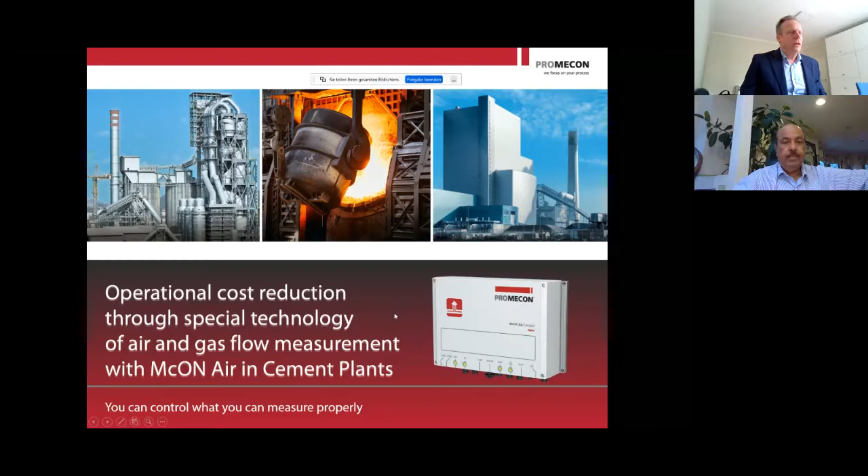Actually, what I would like to focus on today is process gas flow measurement. We also call this airflow measurement because very often process gas is air, but very often it's also combustion gas that we have to measure at various temperatures and also with different dust and dirt content. And that's a very difficult task, but it's very important and crucial, especially in the cement industry.

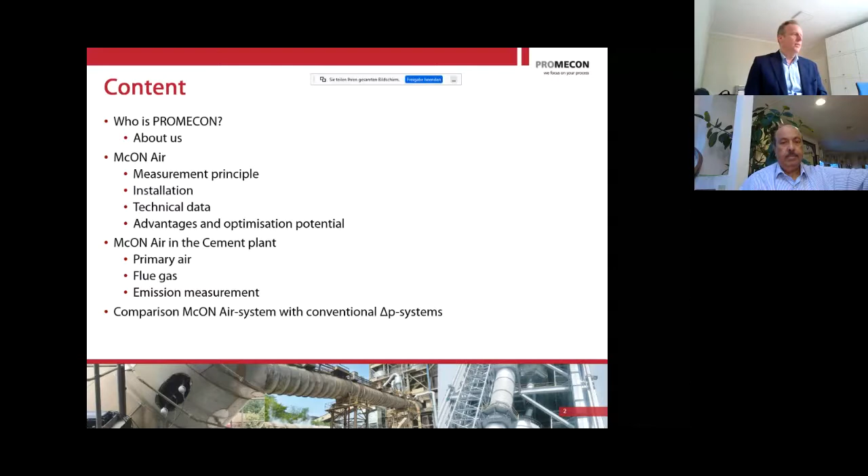I'm going to talk about our measurement principle, which is quite unique. There's nothing else on the market really similar. On the installation and the technical data. And of course, I'm going to talk about the advantages and the optimization potential in your cement plant. Cement plants are consuming huge amounts of energy, not only for the pyro process, but especially for moving process gas around the plant. So I'm going to talk about various options here.

As I mentioned, we were founded in 1995. We're located close to the city of Magdeburg in Germany, and we are selling our systems into the market of power, coal-fired power stations, biomass-fired power stations, into the market of cement, waste to energy, as well as all the smelter industries with a big focus on steel making.

Our measurement systems are used for optimizing the thermal process. And if you had read our logo, PROMECON, it says we focus on your process. We really mean that. Our company has been devoted to the fact that we not only sell measurement systems to the client, but we look into the installation. We even do CFD analysis of the big ducts to see where the measurement has to be located, ideally.

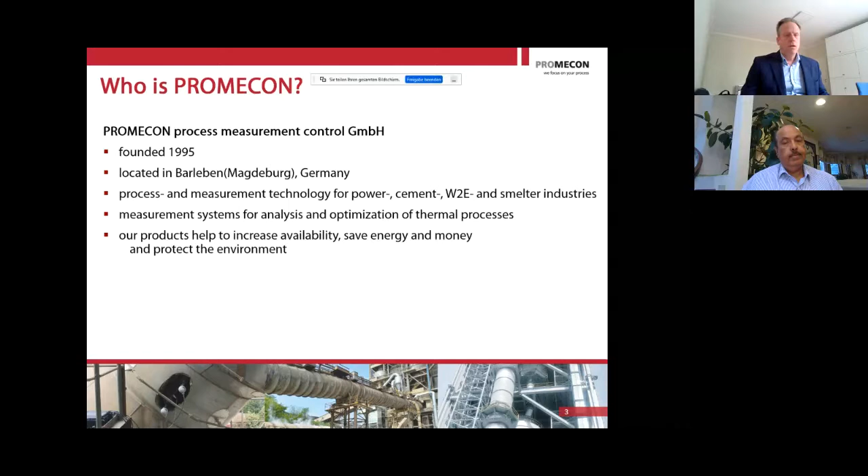We also understand a lot of process parts, so we can also give you the advantage or calculate the benefits and savings. So we are really a partner in your process optimization. And what we're talking about, of course, is energy conservation, ecological compliance, and at the end of the day, saving money, saving fuel, and saving electricity. So I'll just move on.

Here you can see basically our system. Our measurement system is different from the traditional way of measurement. The traditional way of measurement is usually measuring the delta pressure over a certain flow resistance. So you have a venturi or you have an airfoil and you measure the delta pressure. When you have a lot of dust, this is very, very difficult because your pressure taps keep on clogging.

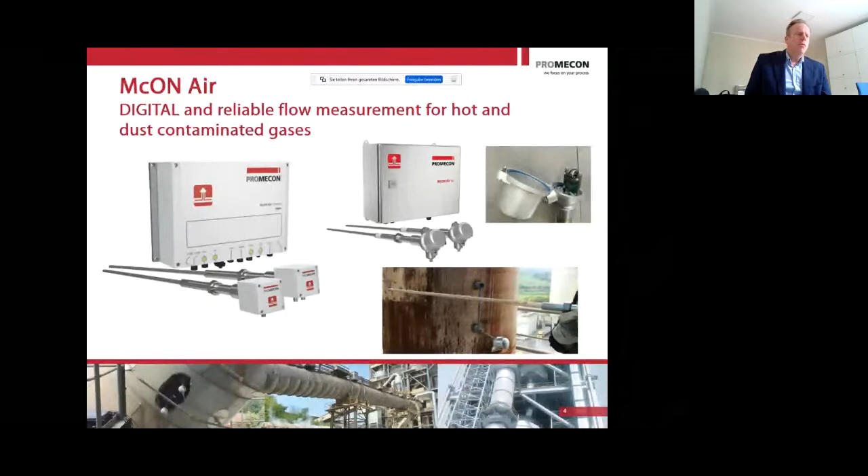Our measurement technology is unique. We use two sensors and we use a cross-correlation technique to measure the flow velocity in your duct. And here is how we do it. We have two sensors which are mounted along the duct. So basically, we're having one measurement upstream and one slightly downstream.

And when I say slightly downstream, I mean about 300 to 400 millimeters of straight run. So very close together, you have these two sensors. And what these two sensors are sensing is basically electrostatic charge.

All the particles going through the duct are electrostatically charged, so they will carry a positive or a negative charge with them. So as these clouds of particles move through the duct, they will leave an opposite charge on the sensor. And that means as the clouds come and go, we will see a current. We will see an electrical current on the sensor. How does that look like?

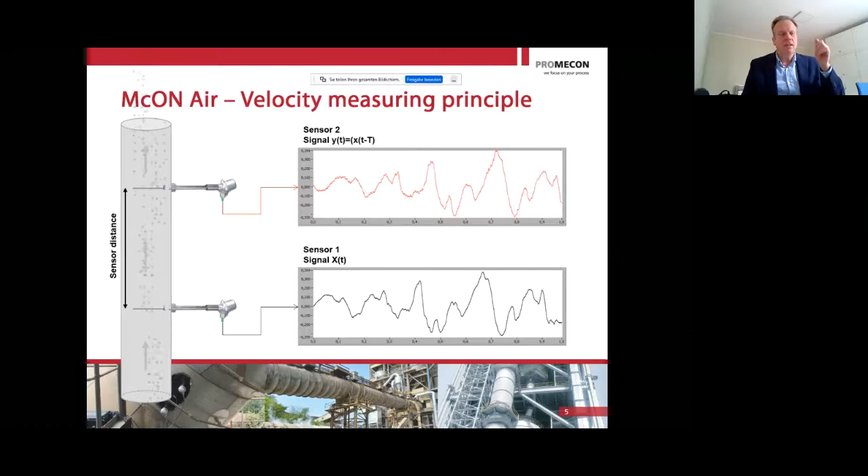Take a look. These are the particles going through the duct in your cement plant. Raw meal, cement meal, clinker dust. And this is what we measure. Our system measures these raw signals. And these are basically a time signature or a fingerprint of the clouds passing by the sensor, right?

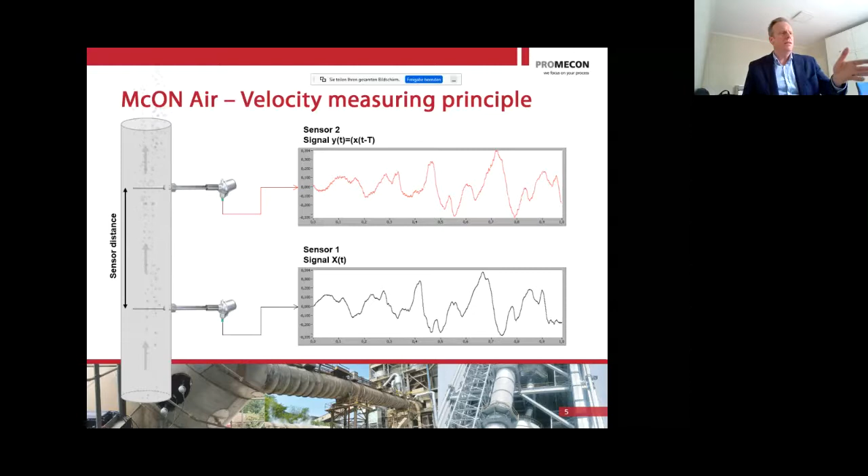Now, as you can see with your bare eyes, the time signature on the two sensors is very similar. You can see this. The bottom and the top are very similar. But if you put them on top of each other, you will see they are similar, but they are time shifted, of course, because one sensor is upstream, one is downstream. So the big question is, how big is that time shift?

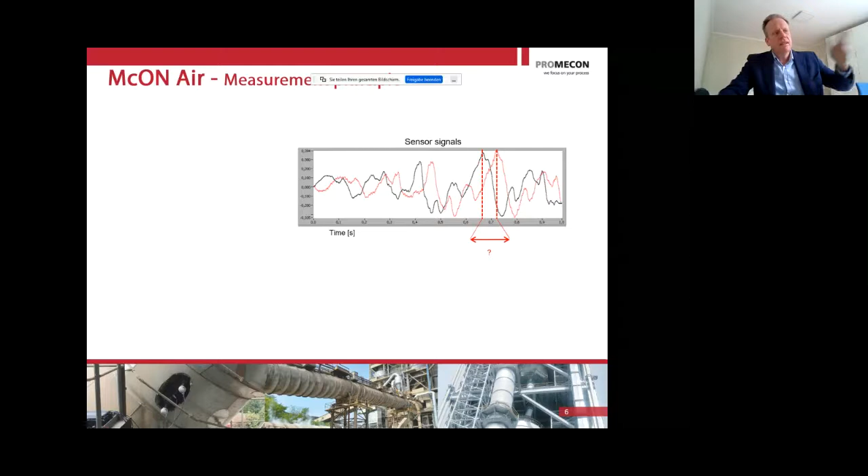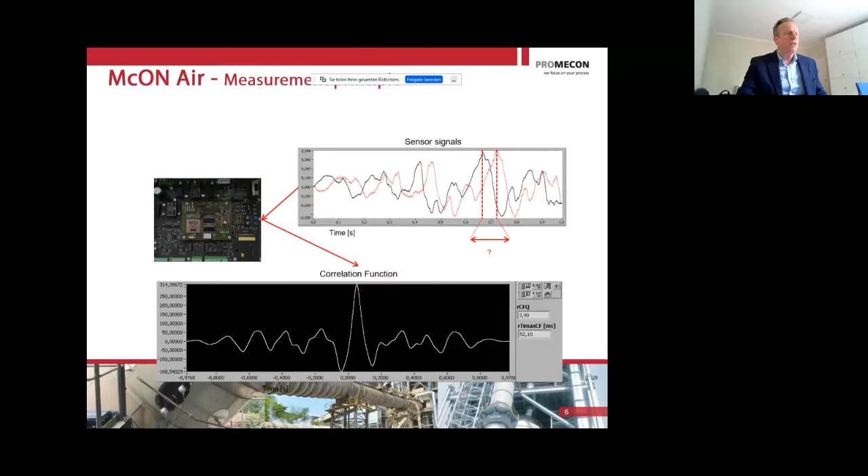And here comes the digital part of our measurement. We have these signals that we record, and then we put them into a digital algorithm, a so-called cross-correlation function. And this cross-correlation function will shift the two signatures until the point that they have the best match, right? So we have a calculation of time shift, and the cross-correlation function will tell us, okay, the maximum of the function is at, in this case, 52.1 milliseconds.

So what our two sensors are doing is they're giving you a time shift. How long does it take the gas to get from one sensor to the other? And now we have the distance of the sensor, for example, 350 millimeters. We divide by the time shift and we get a velocity. So we can measure raw gas, process gas velocity.

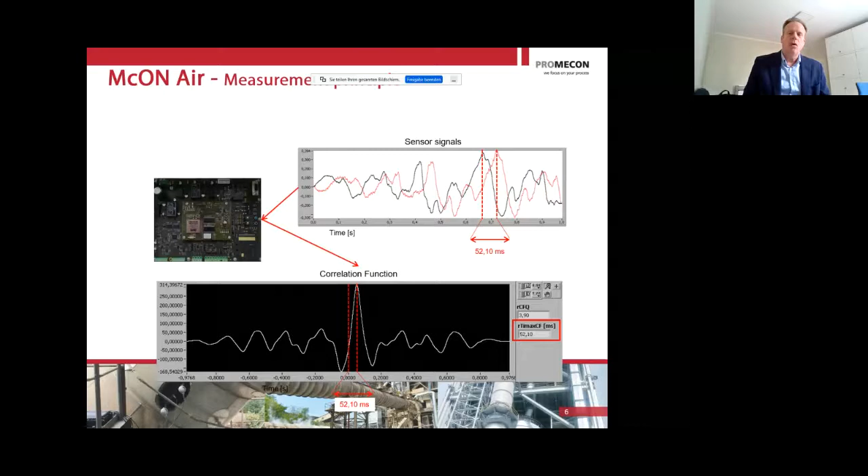Taking the cross-sectional area of the duct, we can then multiply with this area and arrive at volumetric actual flow, right? Now, if you take the gas temperature and the barometric pressure, you can then also calculate the standardized gas flow on that location. That's all. It's a very simple way to measure.

So you can put our sensors into any duct. You should have a certain minimum straight run upstream and a little bit of downstream if you are using one sensor pair. I know that in modern cement plants, some ducts are shorter, are more difficult. In this case, sometimes you have to use multiple pairs of sensors in order to get an accurate flow reading.

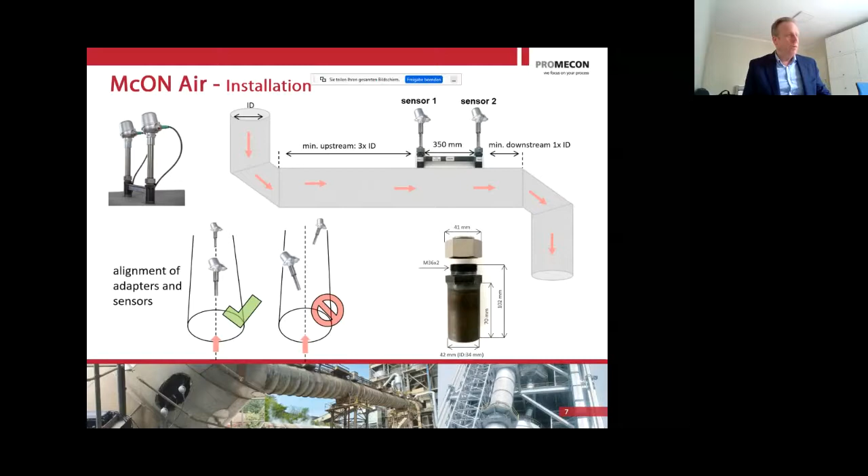Our company will support you with that. We will support you in finding the right location. We can give you some calculations and also experience on where to put our sensors in order to get a valid and accurate reading. Now, I want to let you know a couple of very fundamental advantages of this measurement.

As you can see here, you only have a box and two sensors, and what you get is a 4 to 20 milliamp signal or a system fault signal for our measurement. And since our measurement is purely digital, and since we are only measuring time, time is the only variable that we measure, you will not have to recalibrate any drift or any zero span or anything. Our system is calibration free. It is recalibration free over the life of the box.

And this is why so many cement plants around the world are using our system. We are installing these systems with all the big cement makers: Lafarge Holcim, Cemex, Italcementi, Heidelberg, you name them. Everybody is using these in modern plants, whether they're erected in India or in China or in Africa. A lot of new plants in Africa. Our system is usually specified in many, many plants from the start because it is a drift-free, maintenance-free, calibration-free, recalibration-free system.

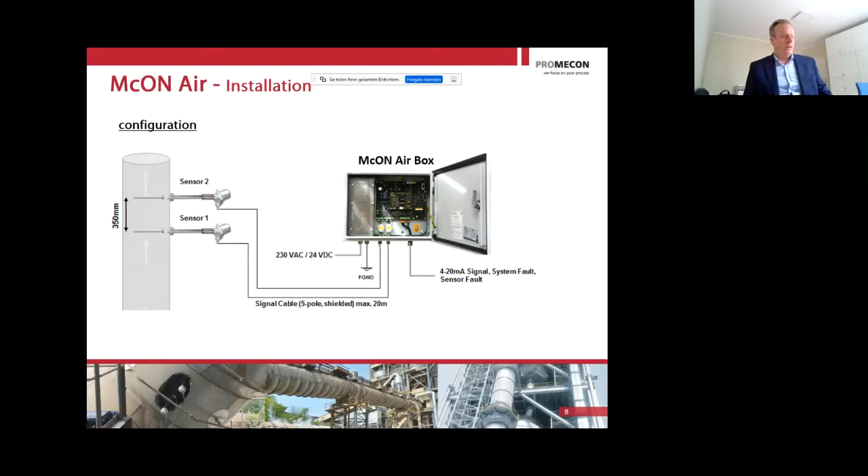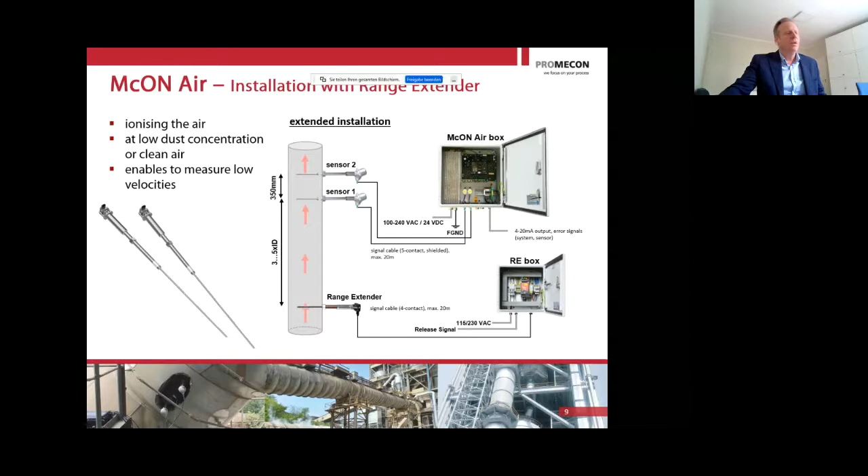We also have a version that uses a so-called range extender if there is no dust available, but I think no dust in the cement plant is not very common. We always have enough dust in the cement plant. So the setup I've shown you before is probably the one that you're going to use.

So what are the characteristics of this system? First of all, we can measure up to 1,000 degrees Celsius of temperature. So you don't have to worry where we measure. We even have some special sensors ranging above 1,000 degrees Celsius. So even tertiary air measurement is not a problem. Measurement in the downcomer, measurement on the bypass, all possible. The velocity range, as you can see, we are measuring delta time.

So we have a linear measurement. And that's a big advantage, again, over the delta pressure, because delta pressure has a square root measurement. So because of the Bernoulli equation, you have a non-linear measurement. The PROMECON measurement is linear, and that shows in a huge turn-down ratio. The normal measurement that we have ranges from a few meters per second up to 100 meters per second. We could even go higher, but that's usually not demanded.

So large velocity range. Dust concentration range. Many people ask me whether this is a typo. It's not a typo. It goes from 0 milligrams, from absolutely zero, to about 3,000 grams per cubic meter. So you can measure actually the raw gas out of the raw mill directly. Huge advantage in controlling the raw mill.

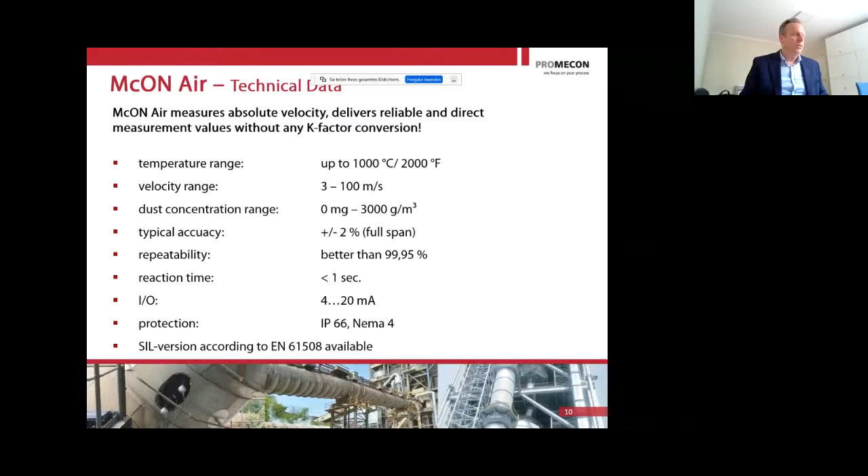Repeatability, it says 99.95%. I think our repeatability is even higher, because the repeatability is only depending on the accuracy of our internal digital clock that samples, right? So our repeatability is the biggest advantage. Reaction time, smaller than 1 second. And again, you get 4-20 milliamps and IP66 NEMA 4 protection.

So what are the main advantages? No K factors for calibration, no drift, no duct modification, no regular cleaning. These are the main advantages. I would like to name another one that has not been on this presentation explicitly, but it's worth mentioning. We have 2 sensors. We are measuring a time shift, and we are calculating the velocity by the distance between the 2 sensors. Why is this important? The distance between the 2 sensors is a vector. It's basically the distance that's orthogonal or perpendicular on the 2 sensors.

Why is this so important? It is very important because we are not measuring any lateral velocities or any swirl component. If you have a swirled flow, our 2 sensors will tell you the velocity vector that is in line with the pipe axis. And swirl is one of the most common factors for mismeasurements on these large plants. If you have an airflow and it goes around 2 corners, up and right and down, then you will automatically have a swirl, right? So swirl will not affect our measurement at all. And therefore, it is very worthwhile mentioning.

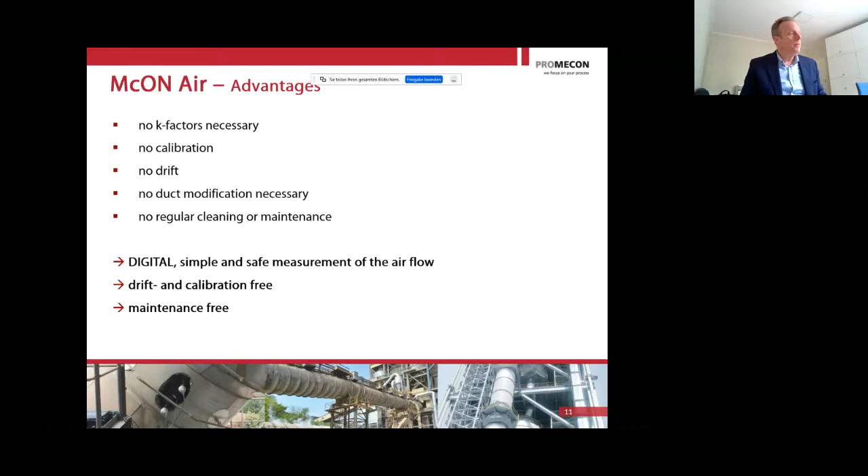So I would like to use the rest of the time that I have to show you some typical examples of where we measure and what we do in a cement plant. You can see a typical cement plant here. You can see a vertical roller mill, raw mill, and the outlet of the raw mill, and also you can see the recirculation duct going back into the raw mill, right? So raw mill is a very big focus of our measurement in a cement plant. Then, of course, further right, you can see the bypass, also a very important measurement. And then on the kiln preheater tower, you can see the downcomer.

The downcomer is basically our most popular measurement. We sell more downcomer measurements than anything else because it tells you something about the main gas flow through the whole pyro string, which is a very essential value, not only for operating the ID fan at the lowest possible energy consumption, but also having the right flow and the lowest possible process noise in your pyro process in the rotary kiln.

Then further to the right, you can see the TA, tertiary air measurement, especially for people in India, I think at these times quite interesting, because the tertiary air is the oxygen input to your pre-calciner. And the pre-calciner is a big source of thermal NOx, and NOx emissions in cement plants are a very big issue in India at this moment. So better control of your tertiary air into your calciner is a big point. Now, you can either create the NOx in your pre-calciner, or you can create the NOx in your main burner on the kiln head. So to mitigate both, you need the correct airflows, and the TA measurement is a keystone for that.

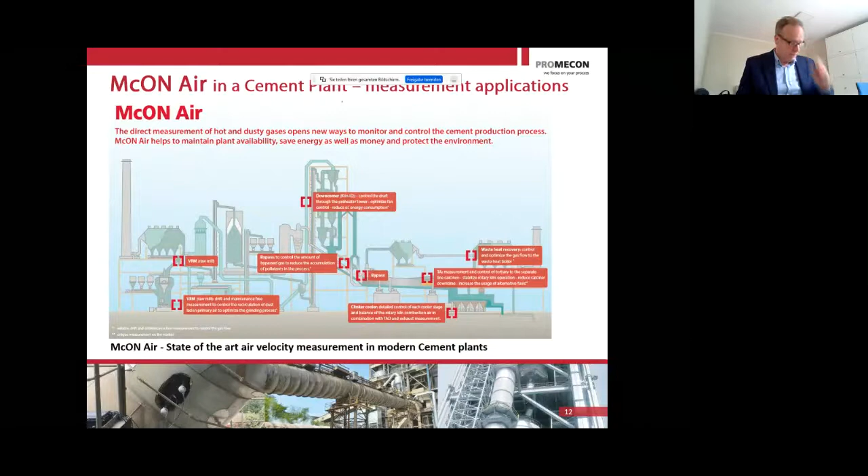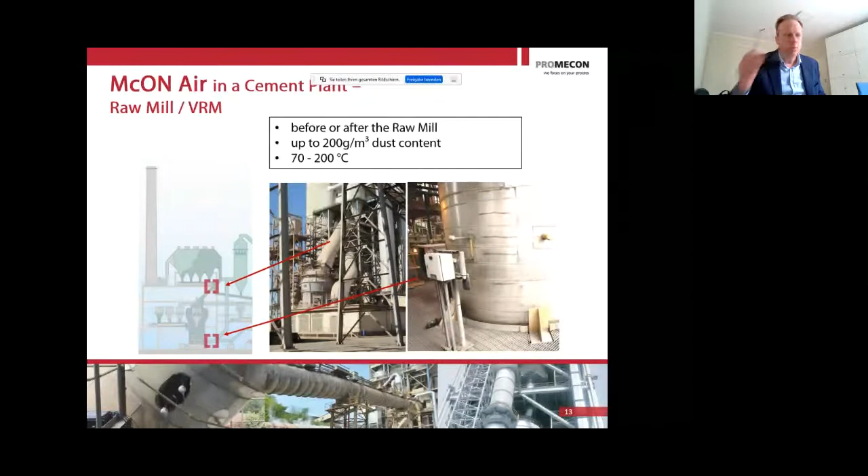Let's start with the raw mill. The raw mill is one of the most important systems in the plant, and it has a huge energy consumption. Again, here, a big part of the energy consumption is really related to ID fan consumption. Now, how is the ID fan operated? You all know how your operators struggle to keep the raw mill operated correctly. So the ID fan has to be operated in a way to achieve a certain minimum flow.

If you underdraft the mill, you will fill up the mill, the mill will drown, and the mill will trip eventually even, which is a major event. Nobody wants that. Raw mills are big monsters. Nobody wants to shovel out a raw mill. Cleaning out a mill is a big thing. And we found that in many places around the world, operators tend to overdraft the mill in order to have a safety margin on the air draft through the mill. So the security factor is there. Usually it's like 15%, sometimes even higher, right?

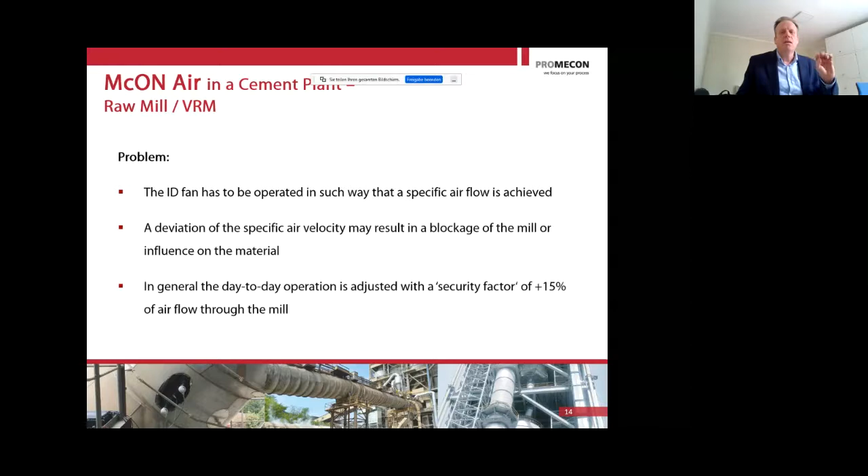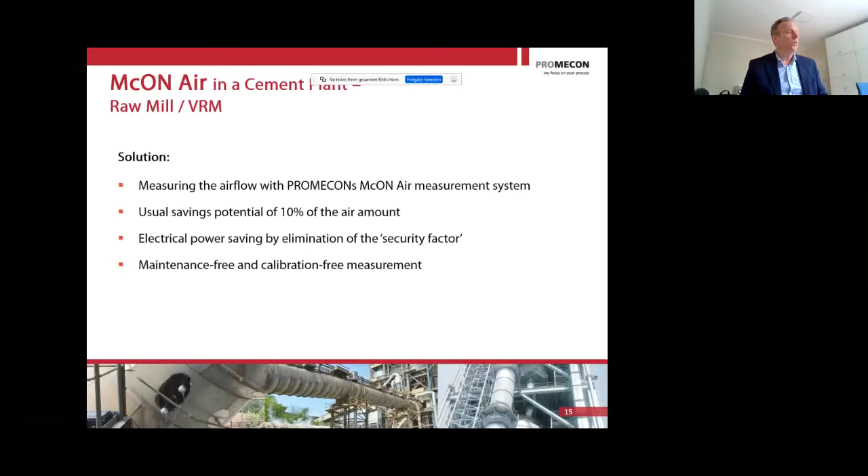Now the big point here is the PROMECON system allows you to have an exact measurement of the raw gas through the mill. And by that, you can reduce the safety margin to a much lower value. And this results directly in a huge saving of electrical energy on the mill fan, because the mill fan is usually a very big fan for these sort of mills.

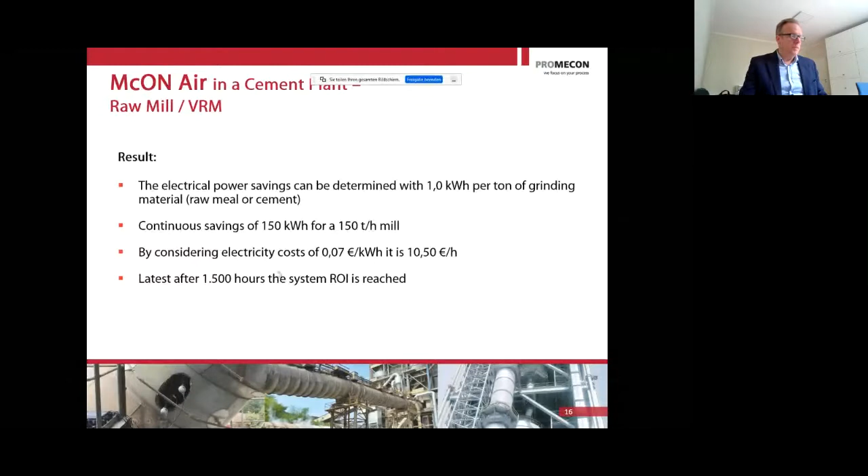This is an example. Please don't take these numbers as exactly right to the last digit, but they are just showing you the order of magnitude of savings that you can expect. This is what we have achieved, for example, on Holcim mills in the US. These are the savings, continued savings of 150 kilowatts for a 150 tons per hour mill. So by considering the electricity costs, this is about 10 euros per hour, right? So after 1,500 hours, you can have an ROI. It's already achieved. You will have a huge payback and a low payback time.

ID fan, kiln ID fan regulation, downcomer. This is another big thing. You have another big ID fan using a lot of power on the downcomer. By the way, I think most of the fans of this world are not adjusted properly. Most of the fans use too much energy, and in most cases, the operators are not really running on the fan curve. Most of the time, fans are operated outside the fan curve, and therefore you use too much energy.

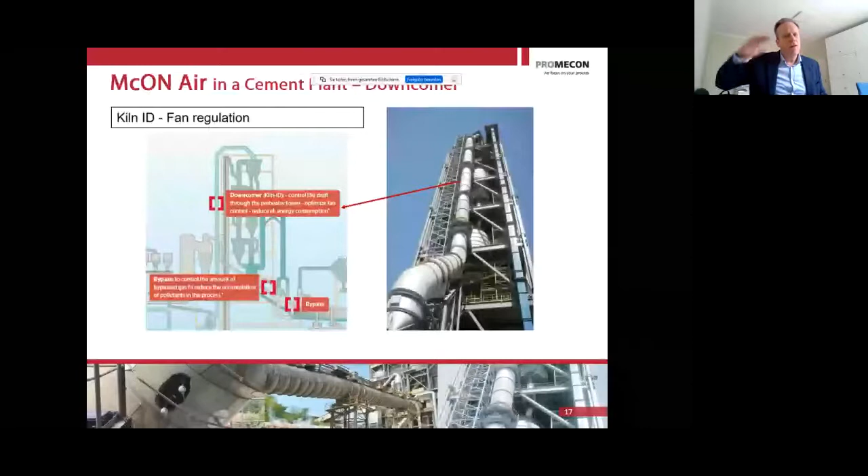But on the downcomer, again, it's very important to note: are you overdrafting, especially on the short term? You regulate the amount of draft through the kiln, usually by measuring the oxygen. And measuring the oxygen is fairly complex and fairly difficult because the values are jumping around and you don't have very regular readings. So very often the ID fan is not operated in a flat line, and therefore, on the high end, you're using too much overdraft.

And the big issue here, of course, is that the fan curve is non-linear. If you have a big ID fan even with a frequency inverter, then the energy consumption rises to the third power with flow. So if you reduce flow by 10%, you can reduce power by 27%. So reducing fan power consumption is a very, very valuable thing.

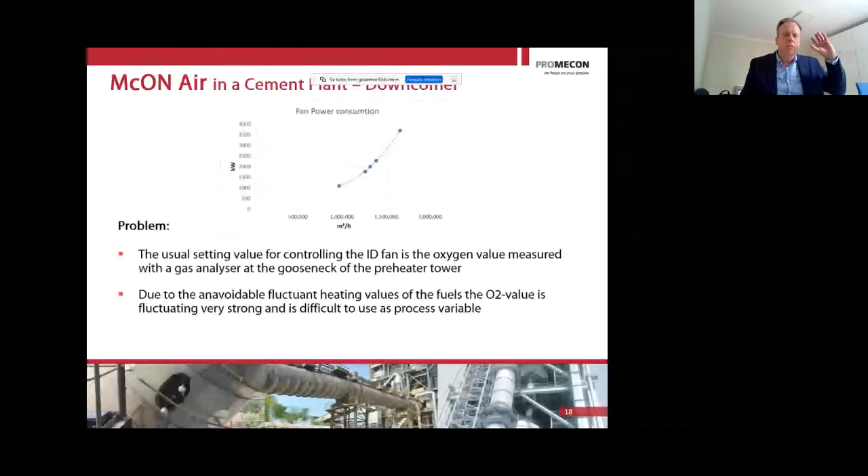The solution to this problem is usually that the fluctuations are reduced by measuring the flow directly with PROMECON on the downcomer, right? And there's a short-term control on the fan, which is done by the PROMECON instrument. And then there is a long-term control, which is done by the O2 controller. So you have a cascaded controller, which in the long run keeps the O2 content in the kiln right, but at the same time avoids any large swings in fan control.

This value very often is also fed into the plant expert optimizing system. Many plants have an optimizing system, either an expert system or a neural net, and they use this value in order to control the ID fan and even the burner and the kiln better.

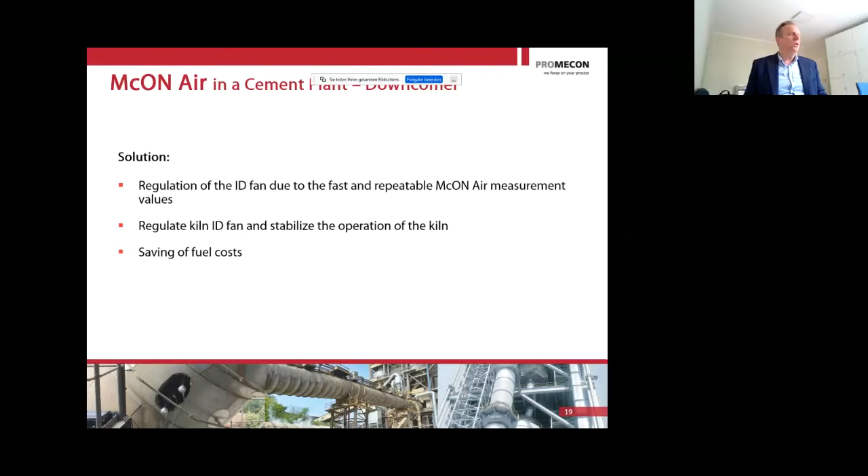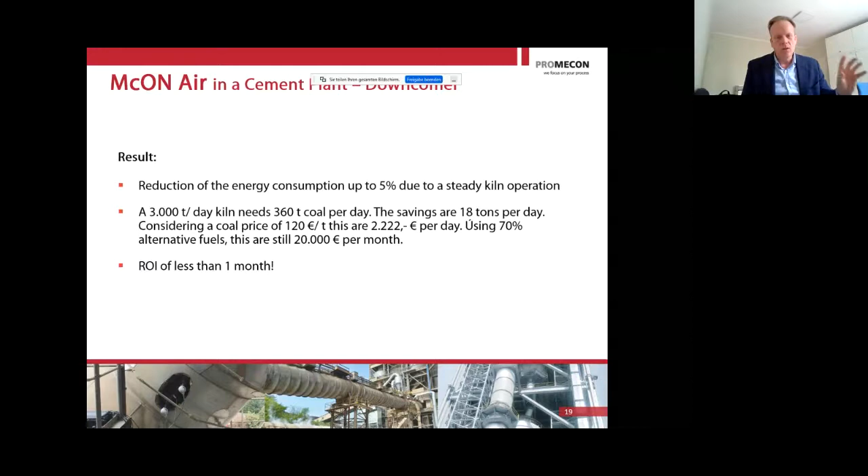So again, here, bypass, another example. Not every plant wants bypass measurement, but the ones that do are really desperate. They have problems with chlorine or other things that they need to take out of the process, and they want to know how much gas they have to remove or they are currently removing with which result. And also here, it is for optimizing the process conditions and smoothing out the operation of the fan.

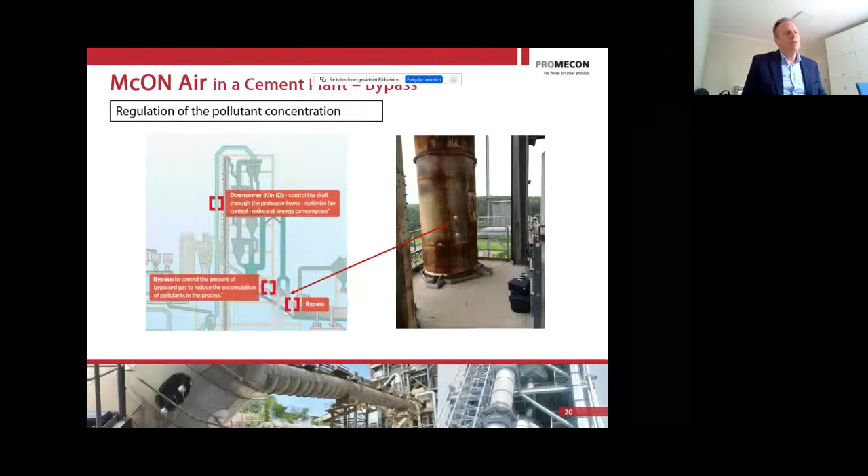So we want to extract the right gas amount, and with the right sulfur and alkali concentration. We want to maximize the waste heat of the clinker cooler, of course. It's a big energy loss, and the performance of the kiln. Yeah. So we have quite a few bypass applications.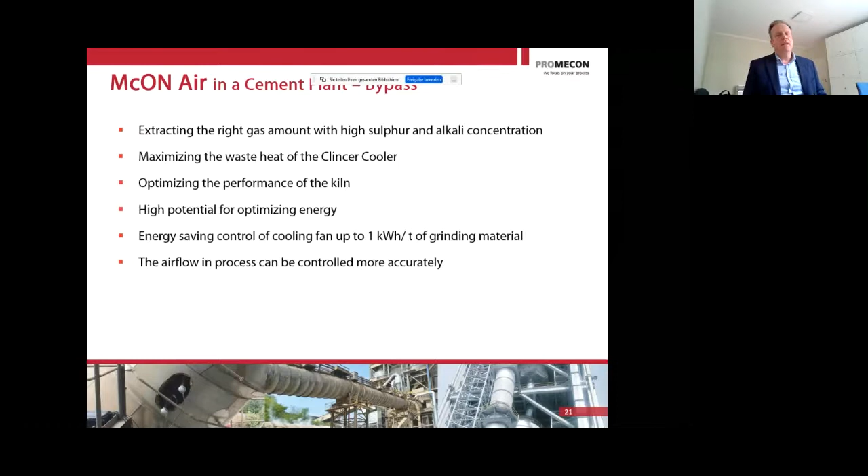Here you can see a very nice example of a German organization, the VDZ. Some of you might know them. It's a very famous organization of cement producers, and they have a scientific group that wanted to compare the measurement of Promecon with their extractive measurements. So they made a grid, and they found a very, very good match between our technology and their classical testing regime.

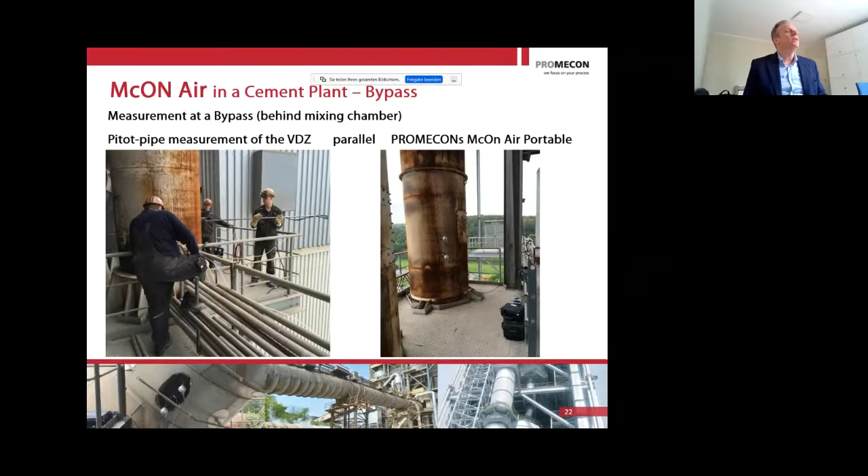Now, tertiary air, as I mentioned before, tertiary air is probably the harshest and the most difficult application, but a very important one. You have NOx formation in the main burner, you have NOx formation in your precalciner, and you try to avoid both. So what you have to do now is you have to have the right amount of total air coming from the clinker cooler. Main part of the air goes into the rotary kiln. Some of the air goes into the TAD.

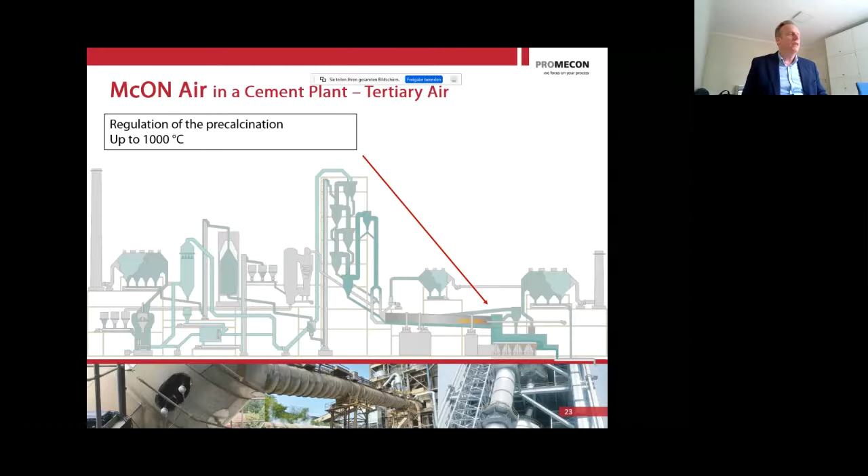Now you want to reduce the total air on the burner so that you get a low NOx formation on your main burner. At the same time, you do not want to draw too much tertiary air into your precalciner so that you have a lot of NOx formation in that calciner. So for that, you need a measurement. You need to know how much goes out through your TAD. So you would like to have an optimal energy distribution, you would like to have a steady process, and you would like to reduce downtime of the calciner.

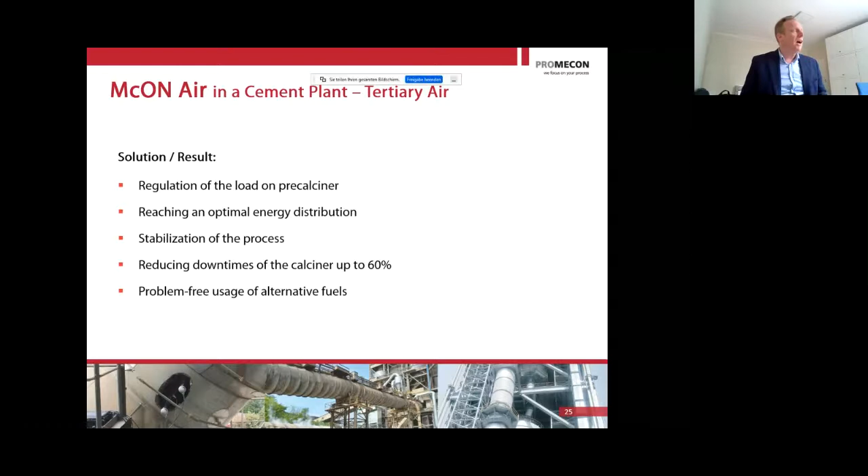The solution here is, of course, a good regulation of load on the precalciner and a very good tertiary air flow that follows that load, right? And we have seen clients that have reduced their downtimes of the calciner up to 60% by better controls. So for some plants, tertiary air measurement is a key element also to availability. And if I see Indian plants which have a high load factor, high production factor, downtimes are certainly critical.

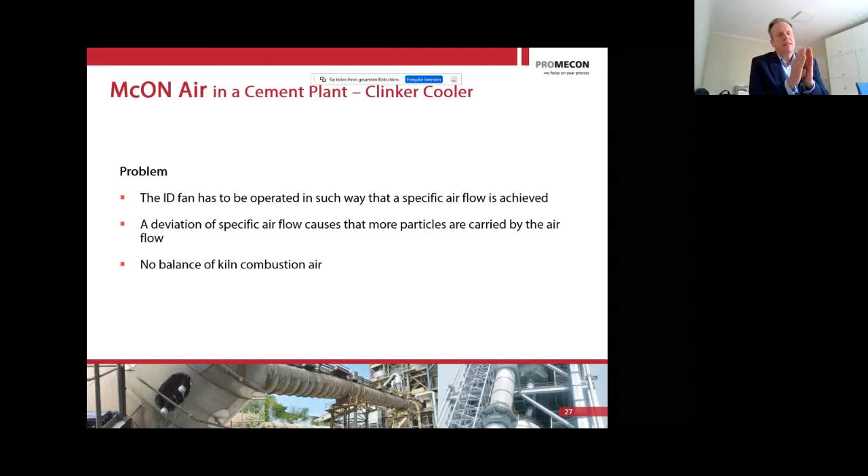So then, waste heat recovery. In the clinker cooler, you have several airflows going out. I've talked on the left-hand side now, the pyro string, the TAD. Of course, there's also the other side. You have the air going to the waste heat recovery section. And you would like to balance basically the output to both sides so that your neutral point in your clinker cooler stays at the same position. Now, this is very difficult because you don't always have the right clinker input. Let me show you this in an example.

Here you have the clinker cooler, and on the clinker cooler, you have several inputs, and then you have several outputs. And it is important to be able to have the same balance of the output to the left and the right side so that the neutral point in the clinker cooler stays where it is and it doesn't move. Now, if you have different amounts of clinker falling into the clinker cooler, you have different air demands for the process of the rotary kiln. And that means that your air demand to the waste heat recovery is also changing.

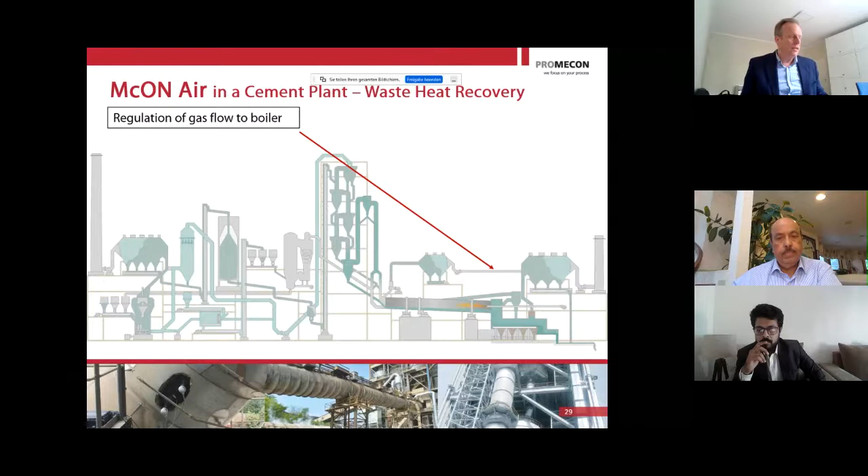And for that, you need to have a good measurement to be able to control this flow. Otherwise, you will have the neutral point in your clinker cooler going back and forth all the time. Well, at the bottom line, it's again destabilizing the process, and you have more process noise than you want. So precisely measuring the hot gas going out to the boiler also allows you to have a better calculation of your efficiency.

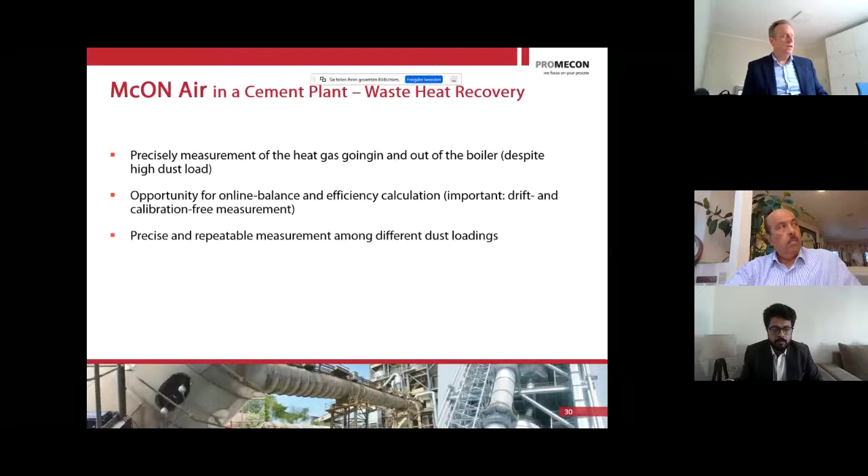You would like to know, when you have a waste heat recovery boiler downstream the clinker cooler, how much enthalpy am I putting into my waste heat recovery boiler? You would like to measure the enthalpy flow. Now, I'm sure you have good temperature measurements on those pipes, but I bet you do not have any good flow measurement. So how can you calculate the enthalpy into your waste heat recovery boiler when you have no flow? You have to have flow. This is the key element. So this is what we're giving you. We're giving you an accurate and reliable flow measurement on your waste heat recovery boiler inlet.

In this case, we have 2 pairs of sensors installed instead of just 1 pair. And that is in order to better balance the stratification that we see in the duct. And as a result, again, we have a very reliable drift-free measurement of flow and, combined with temperature, of enthalpy into our waste heat recovery system.

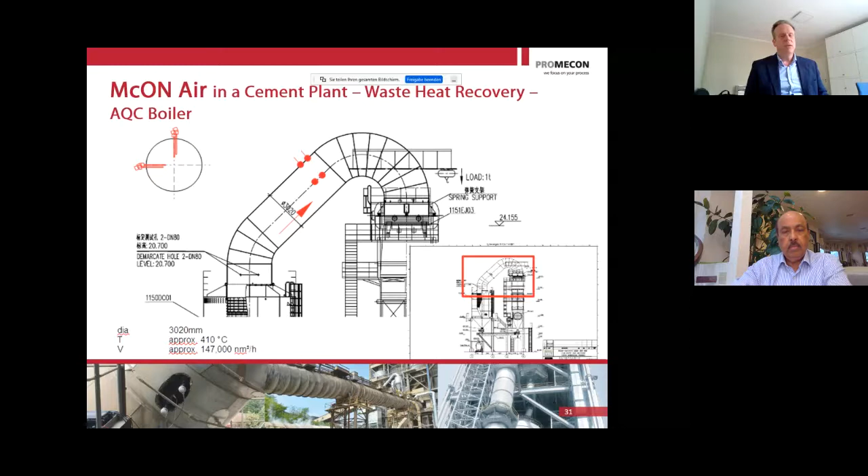So, what are the motivations and benefits and commercial savings, to sum up this presentation? Actually, usually the delta P measurement gives you blockage, it gives you permanent drift. And I'm usually telling this story in power stations because they have a lot of delta pressure measurements. In cement plants, there are not many delta pressure measurements.

In cement plants, the dust load is so high that delta pressure measurements usually clog up in a very short time. And also other systems that use, for example, heat dispersion, like a hot wire anemometer, they drift. Ultrasonic systems, especially in hot gases, are usually not even capable of shining through the duct because the gas density is so low and the dirt amount is so high.

Our system is the first one that gives a very good and traceable track record over hundreds of applications worldwide that we have done for a drift-free, calibration-free measurement with no zero drift, no span, absolutely linear. So this is the main advantage that we have, measuring gas flow in your plant. Probably the biggest key element that is still missing in order to optimize the process of cement making. So this is what I want to tell you today.

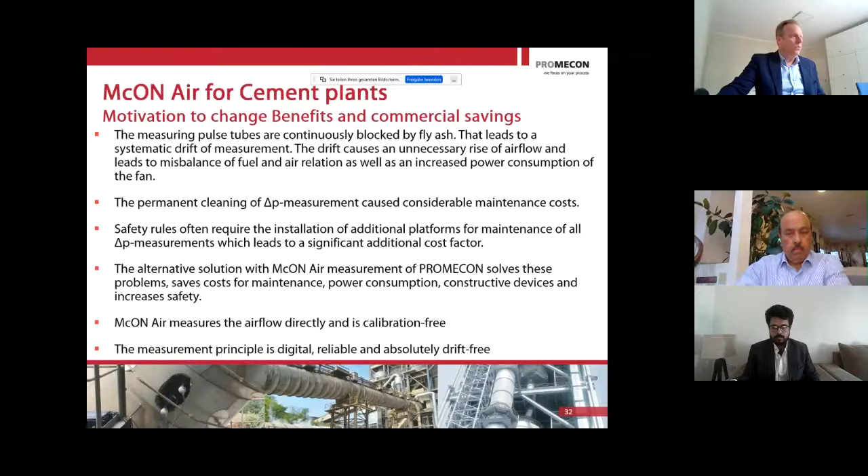We have introduced this system a while ago in the steel industry because the steel plants need to measure gas temperatures up to 2000 degrees Celsius. So measurement right out of the converter or out of an electric arc furnace. They want to know the gas flow as well, but at 2000 degrees Celsius. So how can you put a sensor into 2000 degrees Celsius?

It will melt, right? So we developed this state-of-the-art infrared sensor that looks at the light in the process and that has two sensors and correlates the light. And by this light correlation, we can also measure the gas velocity up to 2000 degrees Celsius. And since we are looking into the infrared, we also have equipped the sensor with technology that allows us to measure not only gas flow, but also carbon monoxide, carbon dioxide, as well as NOx and gas temperature.

In one of our next webinars, I will talk a little bit more about this new technology, which might also become very interesting for the cement industry. For example, kiln inlet or calciner inlet or outlet. So this is the preview on what we are planning in the future. Promecon will stay committed to the cement industry in challenging all the environmental and cost issues they have.

Can you see it now? Not yet. You have to click on share screen, then select that, and then click on share. Yeah, I did that. Okay, I'll do that again. You have to select entire screen icon, yeah. And then you have to click on share. Okay, can you see that now? Yes, yes, absolutely. So I'll go into the presentation mode. Absolutely fine. Please go ahead. Okay. Are you seeing my picture on the side, or are you seeing the main screen? We can see your presentation. Okay, very good. I'll continue the presentation.

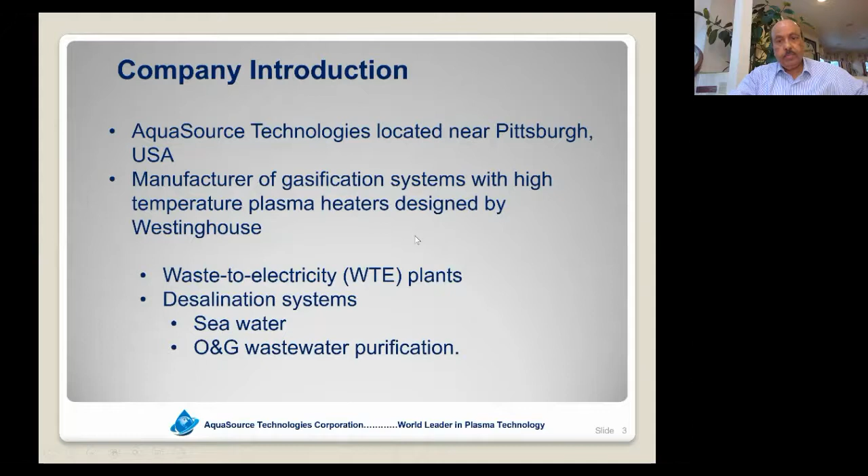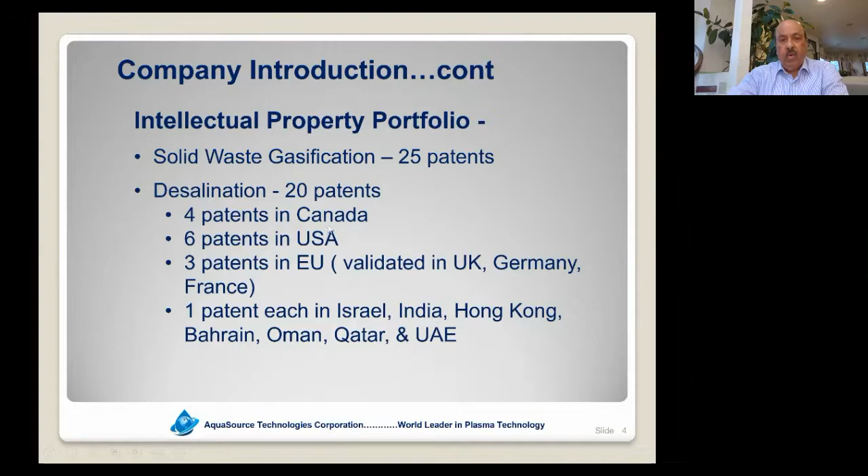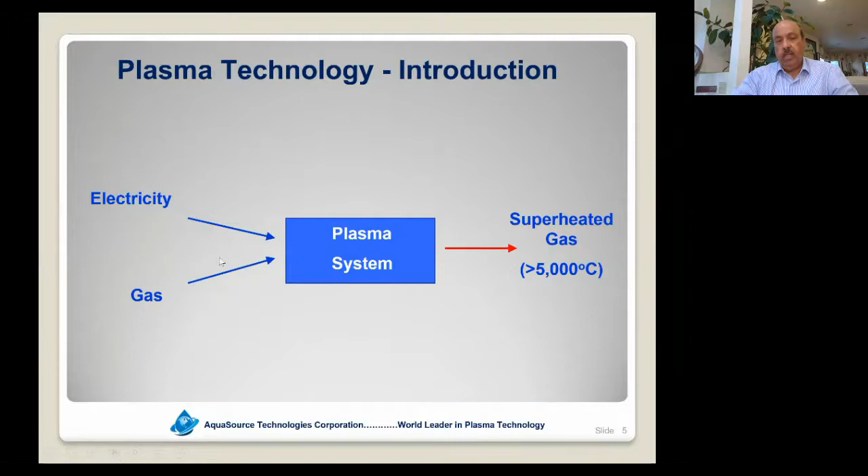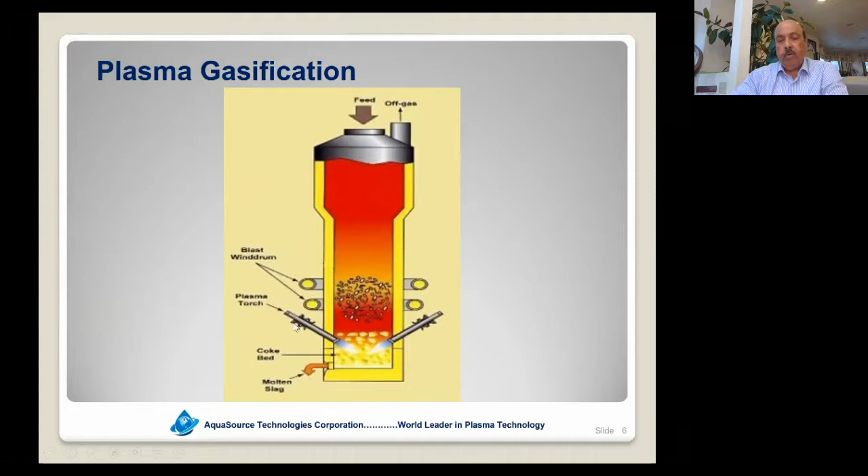And the plasma torches that I mentioned before are applied in the bottom section here. As you can see in this bigger picture, if you can see my arrow, let me make it into a laser pointer. If you can see this area, this is where the temperatures are in the 3000 to 5000 degrees centigrade, far removed from the refractory. And this is where the destruction and gasification take place on a medium, which might be coke, foundry coke, coal, anthracite coal. And this is the waste that is put inside this regular furnace for gasification.

So I want to impress on you that although we are using a very high-tech device here to generate the plasma conditions and therefore generate very high temperatures, these temperatures are contained by proprietary nozzles in the center part of the reactor. So moving to the next slide, the gasification is normally done in... I'm trying to get my pointer back.

Okay, so the gasification is done in an oxygen-starved condition. I want to impress on the audience that plasma gasification is not incineration. The organic components of the feed are converted into syngas. Very key for the cement industry, because you are using coal combustion, which goes through a syngas, but it's immediately combusted inside the kiln. But in plasma gasification, we have syngas that is generated, which removes the pollutants of the feed, the chlorines and the sulfur, etc. The inorganic material of the feed is converted to inert slag, which is basically a feed to the cement kiln.

And the most advantageous point here I want to impress, besides the syngas volume being much lower than the combustion volume, since the velocity is low in that reactor that I showed, there is no fly ash generation. The fly ash and bottom ash are converted to this slag before the constituents become fly ash to exit from the reactor. So the syngas exiting from the reactor is very clean in terms of particle loading.

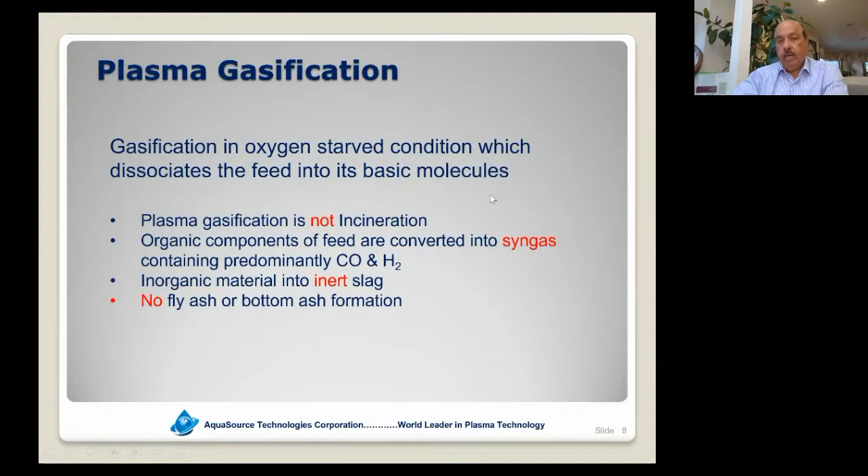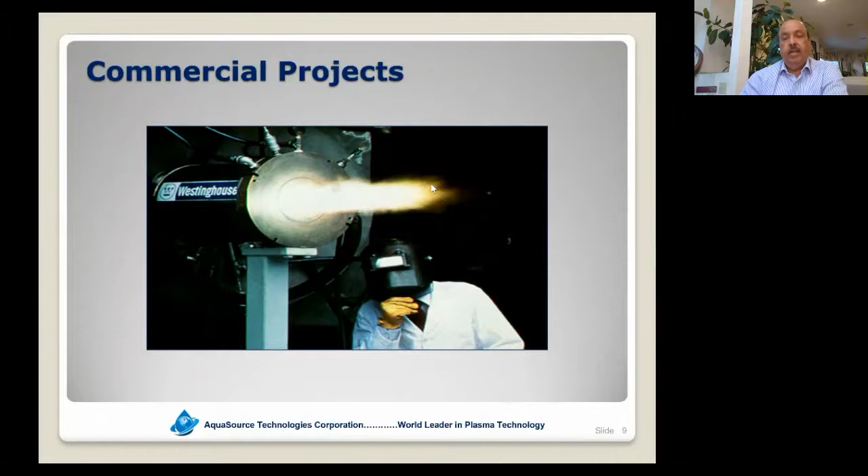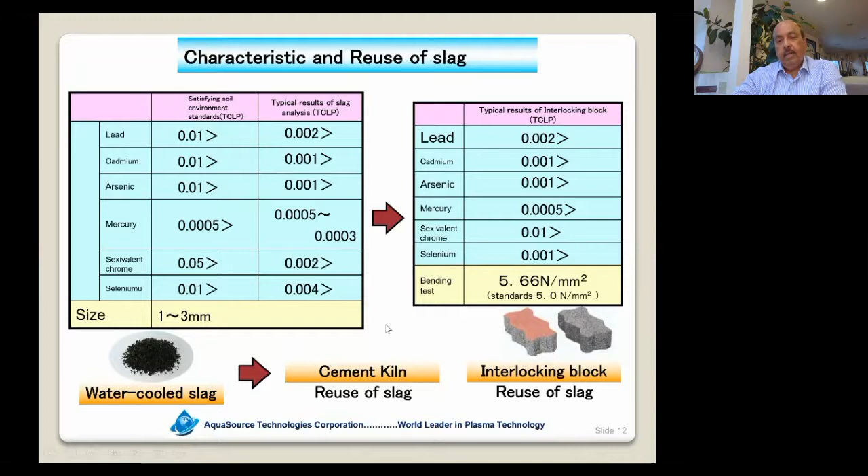In the plant in Japan where this measurement was done, they have very stringent requirements on this slag, but they are able to meet it, and the slag comes out of the water-cooling slagger in 1 to 3 millimeter size, and for that particular plant, they make it into interlocking blocks. The TCLP on the interlocking blocks is shown here, which is orders of magnitude less than the requirement. For the cement kiln, we propose that the water-cooled slag can be reused as a feed in the cement kiln.

I want to show you on the next slide the stack emissions. Again, this is very busy, please excuse me for that. What it shows is the priority pollutants here: the dust, HCl, NOx, SOx, CO, and dioxins. This measurement is from the plant that was doing municipal solid waste, and also a waste called auto shredder residue. It's a residue that comes when you shred cars, and the steel is separated out magnetically, whereas the dashboard, headliner, the plastic components come out as dirty rag, and that is called auto shredder residue. It's mostly plastic, very difficult to combust in an incinerator because it's very fluffy, it flies off.

And here they were doing close to 250 tons per day of auto shredder residue. The slide, as I said, on the leftmost column shows the priority pollutants, the regulation requirements here, and the plant was designed with this target. The measured values at two different times are shown here. The regulation calls for 0.15 grams per normal meter cube. We were 3,000th of a gram per normal meter cube. For HCl, the regulation called for 430 ppm. This was only 39 and 22.

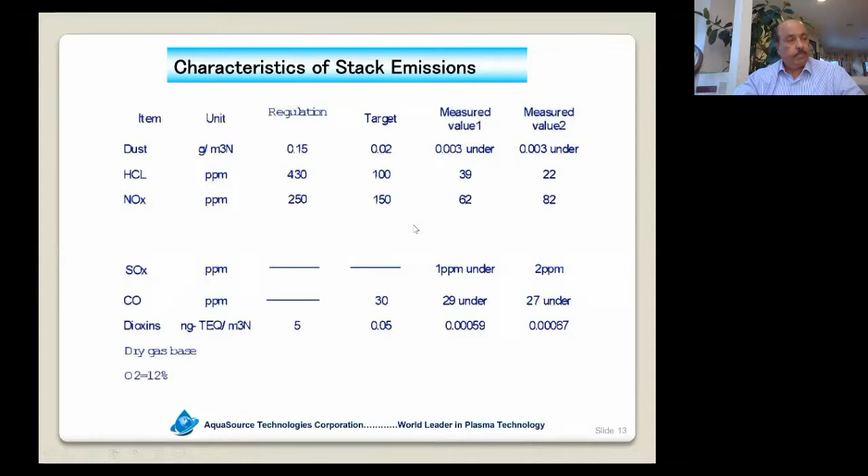Now, let me get into the crux of the presentation, the applications to the cement plant. The plasma gasification plant has the capability of accepting different inputs, different feeds. And here, what I'm trying to impress on is it could be solid feed, liquid feed. Mostly, we would like to use the organic content of that feed. So the waste normally would come from pharma industry, dairy, agricultural industry, chemical industry, pharmaceutical industry, refinery, etc.

So the type of waste, because of the nature of the plasma gasification, very low superficial velocities, intense temperatures and the critical zones of the destruction, gives you a wide range of solid and liquid material feed. This is a very key point to a plant operator, because when the waste is coming into the plant by a truck, you don't want to send the truck back just because it doesn't meet certain critical feed criteria. And that is very important when you are operating 24/7 operation with the customer.

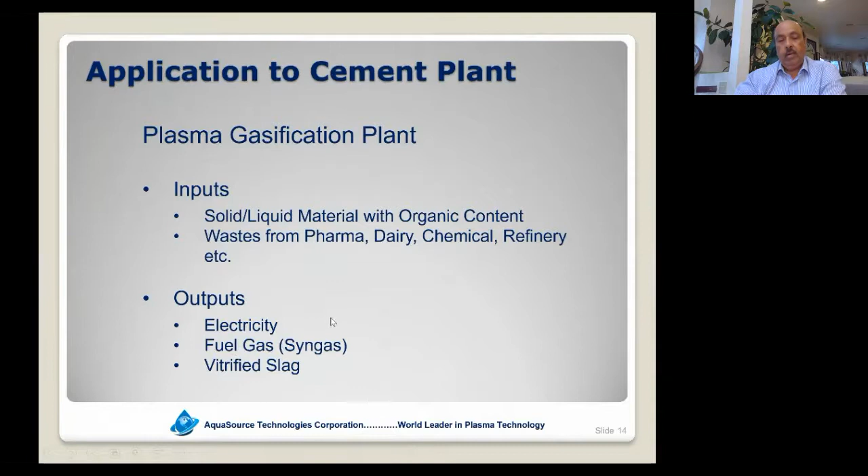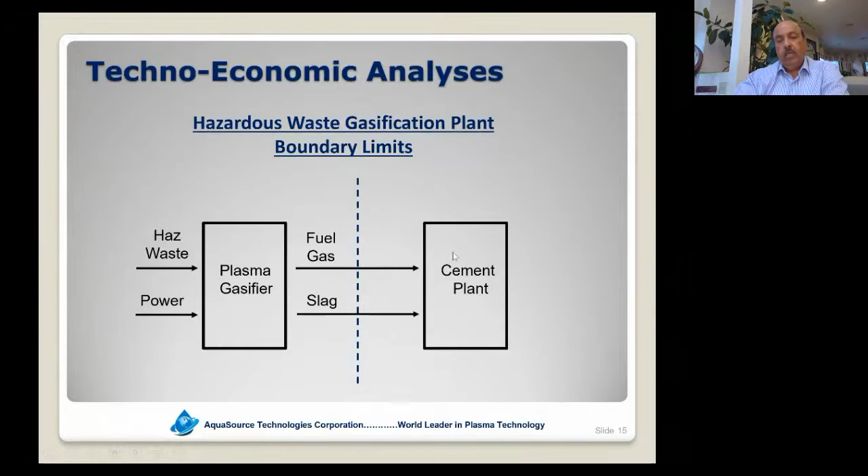Now, for this particular techno-economic analysis, the boundary limits we have used is this. The plant is situated across the fence from the cement plant, and the waste is brought into the plasma gasification plant, which takes a little bit of power to start the plasma gasification, produces fuel gas, comes across the fence to the cement plant, as well as the slag that is produced comes across. So for this particular analysis that I'm going to present, and it's a very simple analysis I want to present today, all the details can be discussed at a much later time, but please remember, these are the boundary limits. Fuel gas into your cement kiln and slag into the cement kiln.

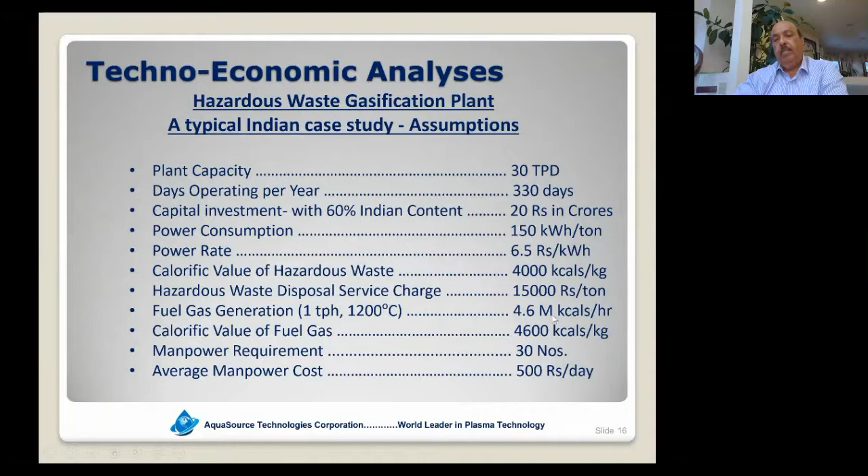Converting it into megawatts that the cement kiln is familiar with, from a 30 tons per day capacity plant, 4.6 million kilocalories per hour equates to 5.4 megawatt. 5.4 megawatt of enthalpy is available into your kiln. These are the enthalpy of the fuel gas. We assume manpower for the plasma gasification plant at these parameters. So I just wanted to present these numbers because those are the assumption numbers for the techno-economic analysis.

The operating cost that follows is here. Let me give you the bottom line. The annual operating cost is 6.5 crore rupees. And as you see here, the biggest components, if you notice, are not the power cost, labor cost, or miscellaneous cost, but it's the depreciation cost and interest costs, which are almost half of the controllable cost that you have.

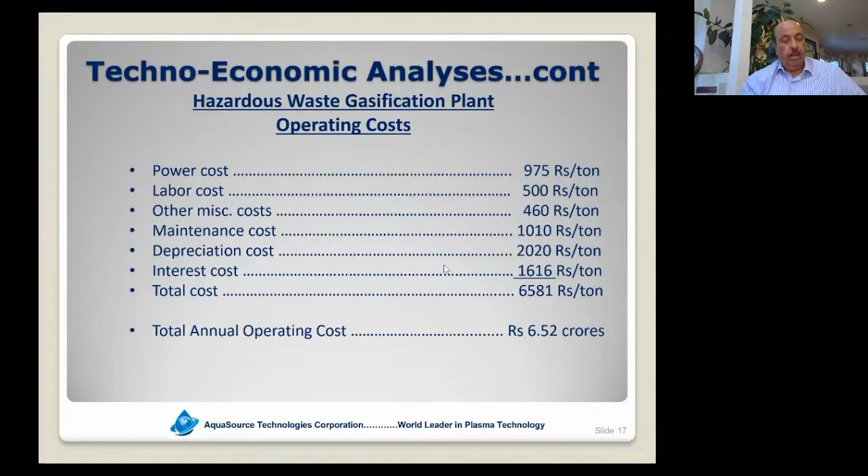The depreciation, I have not given you that figure, but we assume the depreciation rate was 10%, and the interest rate was 8% for the Indian conditions. The maintenance cost was taken as a percentage of capital at 5%.

So in terms of Indian rupees, which you may be very familiar with, it is valued at about 8 rupees a meter cube. And I'm sure it is more than that, but right now I'm just going to go with this figure. So there's an annual saving of about 18 crore rupees per year. For a net profit, 18 minus 6.5 is about 11.4 crores a year. And for a 20 crore investment, it's less than 2 years payback.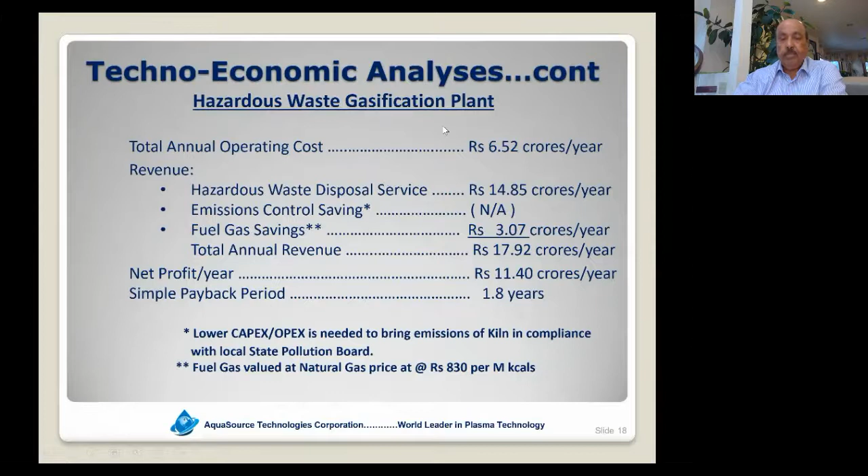We also did the sensitivity analysis on this plant. The likely scenario I presented was this. The best scenario where we increase the Indian content and reduce the capex, the disposal rates are higher, the calorific value is higher, it could be less than a year, but it could be as much as more than 3 years if the capex goes up and the disposal fee drops down and the waste that we are getting is not energetic enough. So that could be slightly more than 3 years. But the likely scenario is within 2 years, you can recoup your capex. So the ROI is very good on this plant.